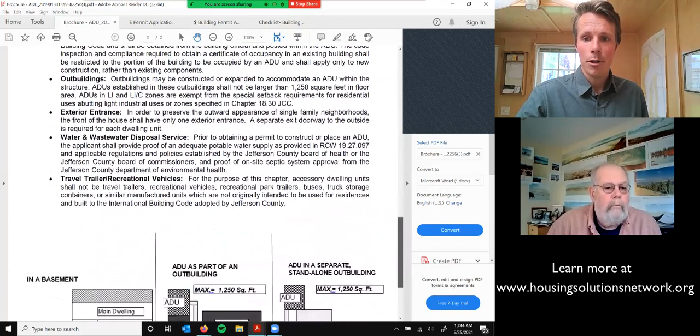And we're going to walk into that and walk through it with Fred here. Fred, why don't you introduce yourself, and we'll start walking people through this ADU permitting process in the county. Yeah, I'm Fred Kimball.

I'm a recently retired building contractor of about 35 years here in Port Townsend in Jefferson County, and I've enjoyed trying to help Housing Solutions Network try to get more workforce housing in our communities.

And so we'll start off with here. This is in the county. They have a separate permit application, and really the basic function of the permit application...

This permit application, this sheet anyway, is to get all the pertinent information: tax assessor's numbers, addresses, names, the names of any professional people, your building contractor, your septic contractor.

It also asks for all of the information about your sewage system or your wastewater system.

Since most of the county is on septic systems, they're taking that real seriously, and so you need to be current on your inspections and all of that sort of stuff.

And so that's what they're after with this first page application: developing the information on what you want to do and accomplish.

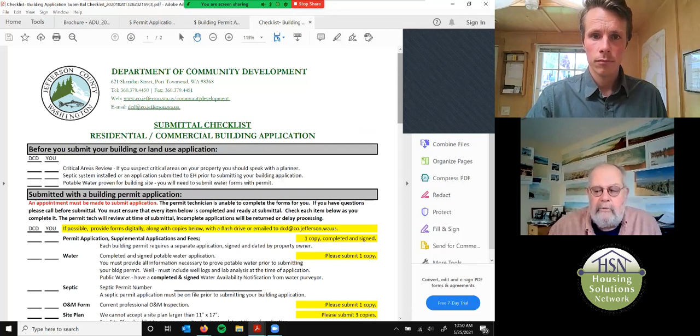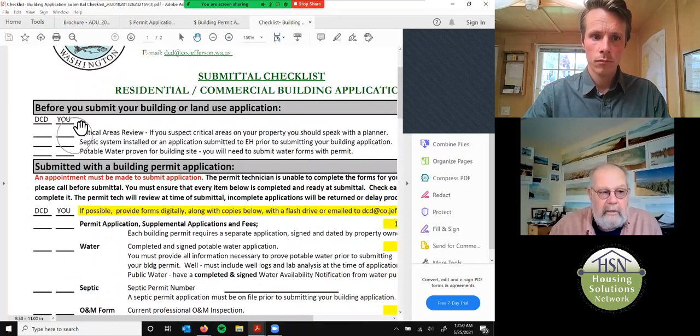Right off the top of the checklist, you can see the critical areas review, and critical areas are defined as wetlands, distances from shorelines, etc. It's something that you can probably get general information off of some maps of the county, but you'll want to speak to a planner, and in the county you'll need to set up an appointment to talk to that planner about any critical areas.

The other item in the county, as we've mentioned before, is that the septic system, if it's totally brand new, you've been into the health department and have the septic permit application submitted, and that all of that has been approved and ready to go before you can really get started on your building permit.

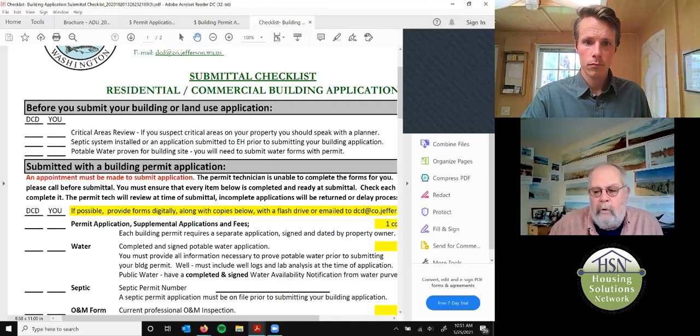And it's the same with the water. There is PUD water available in some areas of the county, but many areas you'll have a well, and you'll have to have water tests. On your site plan, you'll need to make sure that, I believe it's 100 feet, a 100-foot radius from a well to any kind of septic system, drain field, and reserve area. They don't want any cross-contamination with septic and water, and you don't want it either.

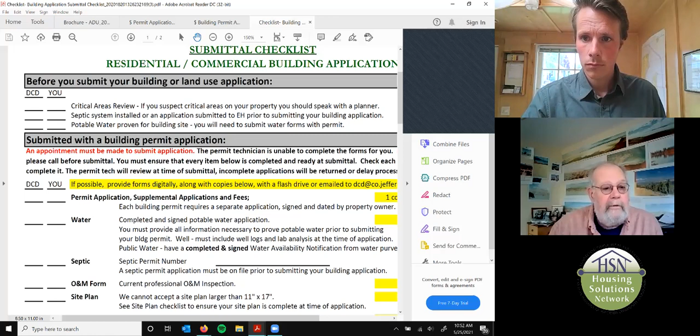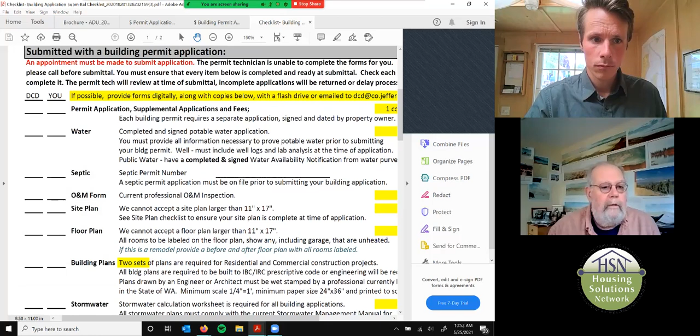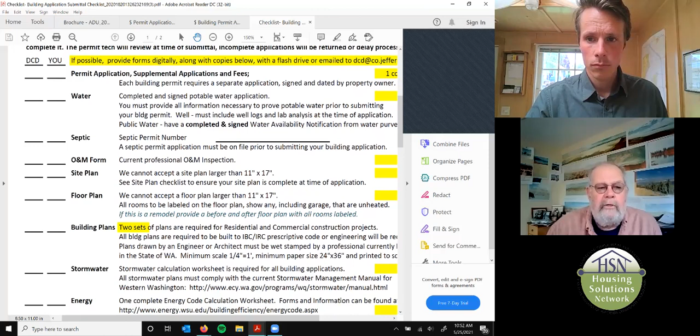As you go down the checklist here, the fees, the water, again, this is the well logs and the analysis. I'm going to speculate, I don't know for sure, but I'm going to guess that if there's some kind of date attached, if your well was tested 5 years ago, they may want it retested - I picked 5 years as just a number, but I'm sure there's a period of time between when the well was drilled and when you're actually going to use it. If it's too long, they'll want it retested for water quality.

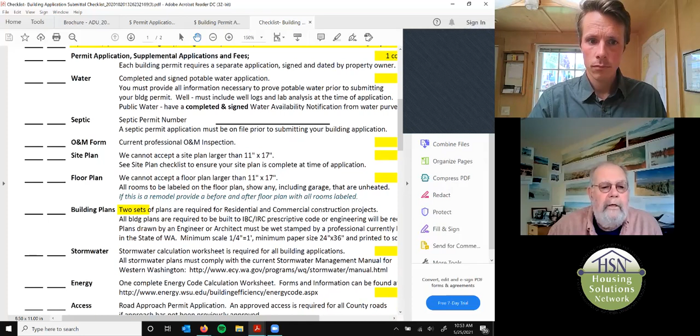Septic permit number, you'll be into the health department for that information. The O&M form, that's the operation and maintenance of the septic system itself.

Many of the systems in the county are pressurized or mound systems and have an annual operations and maintenance inspection. If you take a training class through the county, I believe you can do your own inspections and sign yourself off once you've been through the course. If not, you have to call a service out to do the inspection, and it needs to be signed off before they'll pass on a building permit.

Site plans, here again, they have information on their website about the site plan. Some of the key elements are going to be your well location, distances from the well location to your septic systems, to your building, the planned site for your building, where your residence lies, and all the buildings laid out on that piece of property, and also what the setbacks are in your particular location.

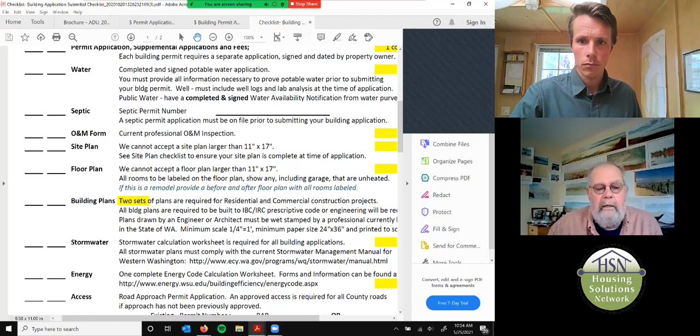Floor plan, again, see the checklist they have on what information is needed on a floor plan. It'll cover things like smoke detector locations, critical dimensions, any kind of braced wall panels, and structural engineering information.

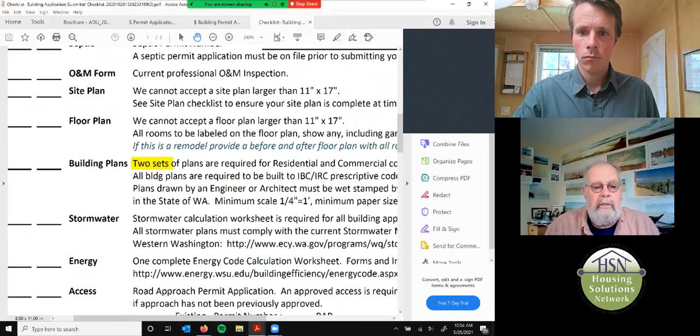Foundation plan will have size and location of anchor bolts. In the building plans, they'll also need sections, typical wall sections, and window and door lists.

So all the things that make a plan set that you can actually go out and build something with is the key element. If you're drawing it up yourself, you may be able to go out and build it with very little information, but the building department doesn't assume that the person drawing the plans and the person building it are one and the same. So just assume that you're going to be handing these plans off to somebody else to build, and they need all that sort of information to get your building put up.

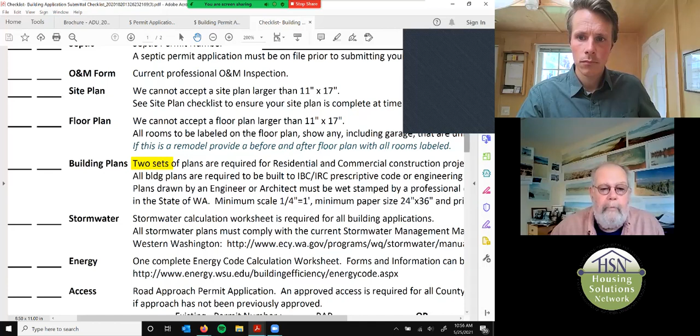Stormwater—they direct you to a rather, I hate to use the word complex, but a rather lengthy stormwater application that you need to fill out, especially if you're near critical areas and or shorelines. They're going to be paying extra close attention to how this is figured out.

The energy line, here again, they direct you to a different form and application, and that basically is you listing the U values for your windows and doors. You're putting down your R values for your walls, floors, and ceiling, your amount of glazing, and your type of heat source, and this is all driven by an energy code that is statewide.

It has nothing to do with the International Building Code. The main floor plan and building drawings are based on the international code, whereas the energy code is a state code.

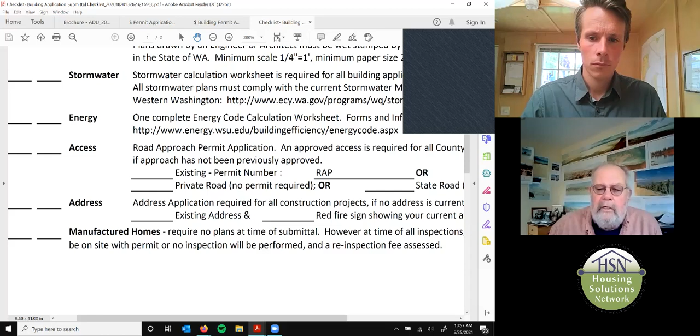Also different in the county is the road access. If you're coming off a state highway, you need to be talking with the state folks and getting a permit to put a driveway onto a state highway. If you're coming off a county road and there hasn't been an existing roadway put in, you'll need to get a permit from the county road department to do that. They'll have requirements for culverts and widths, and that sort of information is what they're going to be looking for.

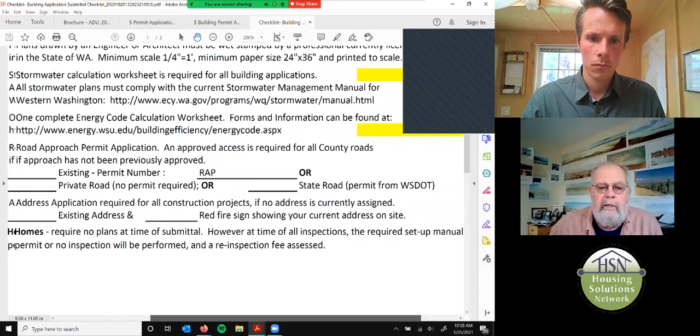If it's a private road, then there's no permit required. It's just going to be what's practical, basically, is what's going to be required there.

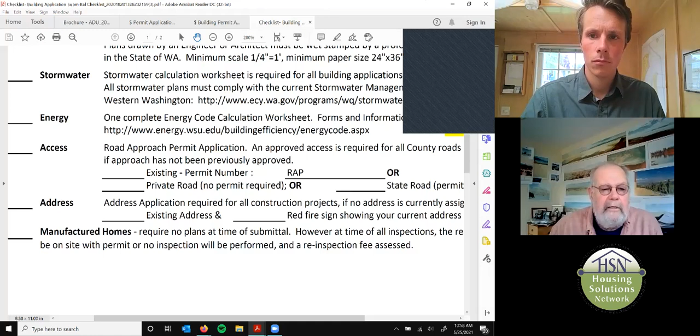Address application—this is going to be, it's all sort of in a package. If there's an existing address and the red fire sign, fine; if not, you'll be applying for new numbers there.

And just a checklist there, a check mark here for manufactured homes. They don't need to require the plan for the mobile home or manufactured home, but at the time when they come out to do their inspections, the plan set for that manufactured home will have to be on site for the inspector to look at. It'll be stamped by an engineer, and the manufactured mobile homes are approved by the Department of Labor and Industries, a state organization.

On that note, it's just the building plans they don't need, but everything else we've talked about, they would need - including stormwater, septic, site plan, the septic permit, well information, road access, critical areas stuff. The energy calcs probably are going to be with the manufactured information, and the stormwater calculation they would also need.

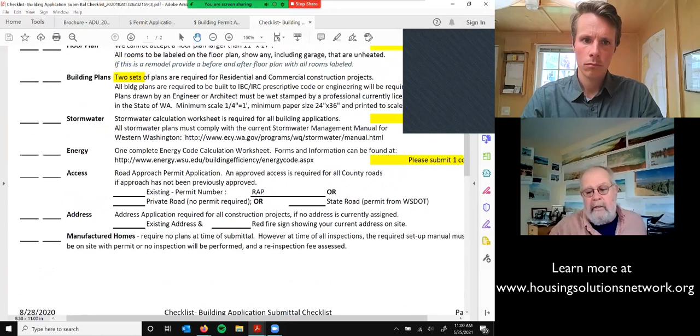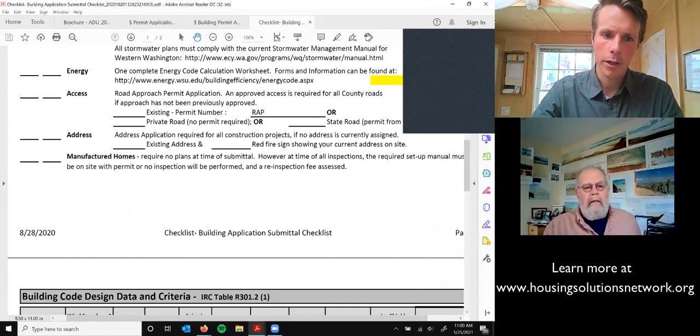But you should be able to, if you're doing a manufactured or mobile home - it can shorten the process potentially to go that way. What is your experience going manufactured versus stick built in the county? My experience is that it's really all the other parts and pieces that take the time to wend your way through the process.

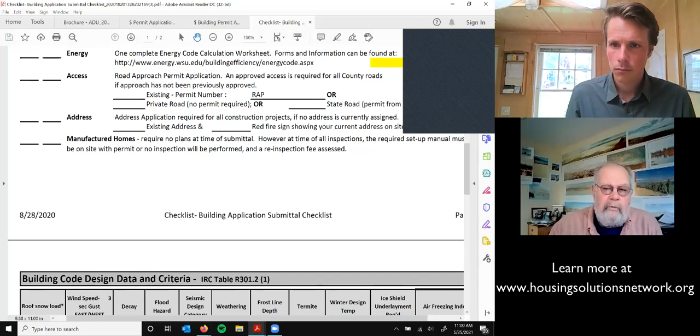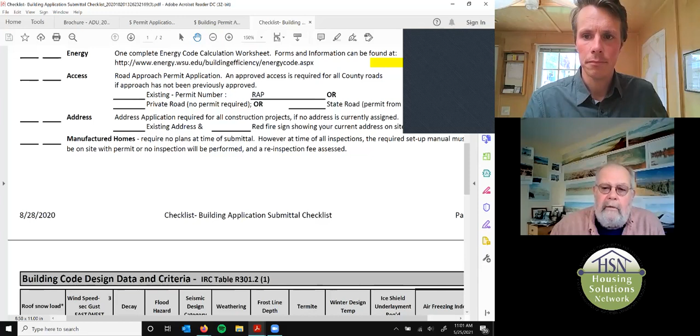The health department with the septic and the water system seems to be more of a time sink than the actual signing off of the building itself. And also, I've never had to deal with the state for getting a permit off a state highway. I can imagine that is kind of a black hole you can fall into because it would require input from their engineers, I'm sure.

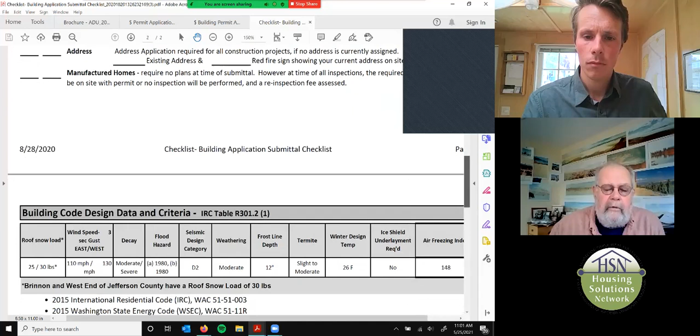So, all in all, the information's on the plan sets. If you have complete plan sets with the information you need for the building, that's really not the complicated part. None of it's really complicated, but it is a time-consuming thing for somebody to put together. It's dragging you through the different departments, and that's really the main difference between being in the city and the county - in the city, they don't have the health department for you to get permitting from, and they don't have to worry about water tests because you're on the public water system.

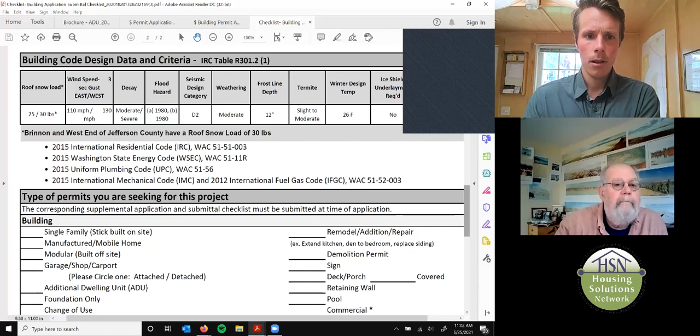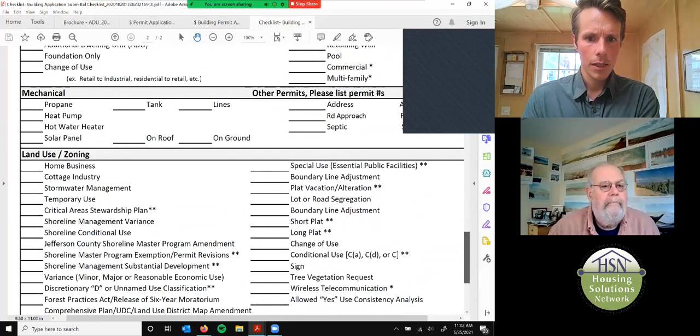So in this final page of the checklist, they have the table at the top with all the variables for projects you could be seeking a permit on. This looks fairly self-explanatory. Is there anything folks should know on this last page? Yeah, the back side lists the different permits that you're after.

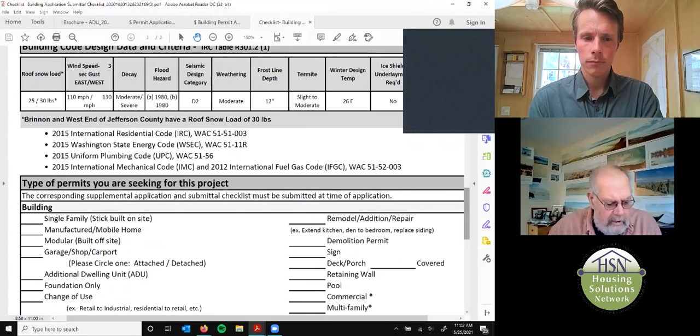If you get down into the land use area, that's a whole different deal than if we're building an ADU - you're probably not going to be down into the land use and zoning questions, because I believe in the county you're kind of blanket allowed to do an ADU as long as you fall within the setbacks and the health department conditions.

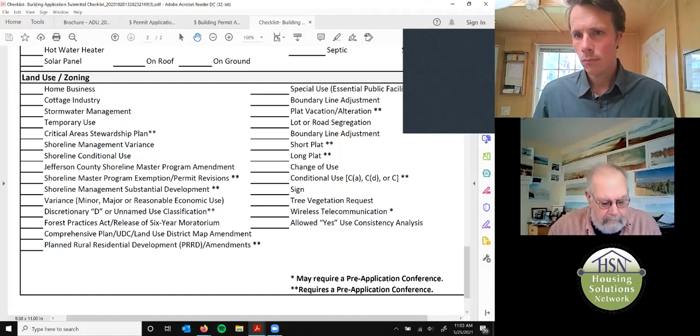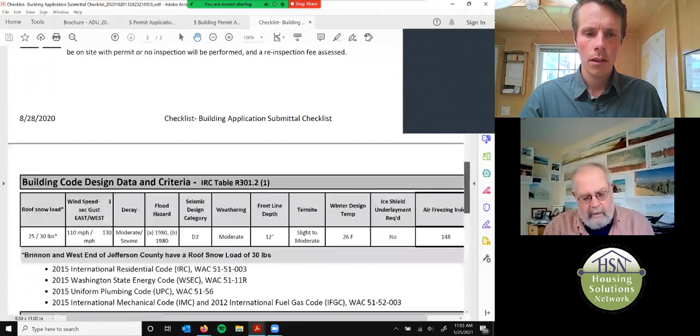I think we've pretty well covered it. Yeah, I believe in the county they want you to schedule, they want your material ready - it's not just a matter of dropping off the plans and application at the front desk with a check. They actually want to schedule a meeting so they get an initial look through your material. One of the big delays in permitting is incomplete information.

Missing critical pieces of information, if not caught at the front desk when it goes in, then somewhere downstream somebody's got to ask the question - the plans examiner calling you or your designer and having to leave a message, then calling back and leaving a message again. It adds time. If we can get everybody putting in completed packages, it's good for the county - they don't have to chase you down to get information - and it's good for us, the customers applying for permits, because everything goes smoothly and everybody's happy at the end about the permitting process.